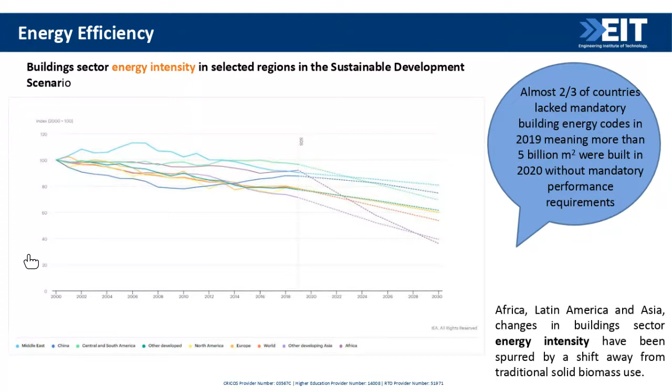So let's move to the next one. Another important point I'd like to cover with you today: heating and cooling. These are important aspects to consider.

About heating, as you can see, this line refers to the Sustainable Development Scenario. The main purpose is 2030. It seems far off, but it's not so far. The main idea is to try to reduce fossil fuel-based equipment when you think about heating.

When you think about cooling, space cooling, just to have a broad idea, it's about 1 gigaton of CO2 emissions, nearly 8.5% of total final electricity consumption in 2019.

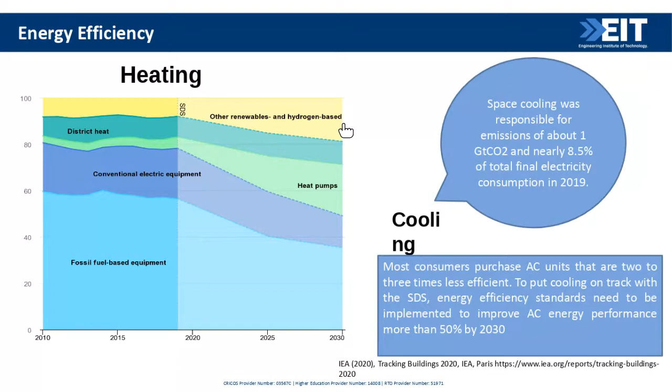Here we have another interesting data point to analyze in terms of lighting. We know in terms of design, there are different approaches to improve natural light - we can maximize daylight, we can use skylights where appropriate.

But let's have a look at the LED sales. According to this data, what we can see is good news - the number of LED sales is increasing, because the cost is falling in different countries' markets, and sales are growing on track. Hopefully, according to the International Energy Agency, this data retrieved from their website shows 90% of sales by 2030.

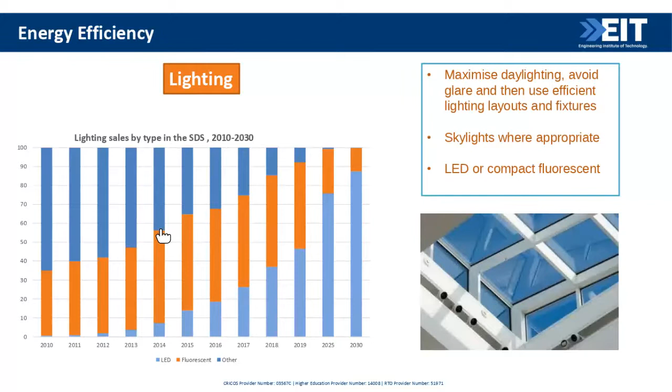So all these are some minimal points that we can consider, points that can contribute to improving our industry in terms of energy consumption. Some points that we can improve in our industry, but thinking about buildings.

Here I want to share with you how to analyze the environmental impact of buildings. I know today our main focus is energy efficiency, but as you can see, different stages - extraction of raw materials, manufacturing, construction sites, operation and maintenance, demolition - all these phases demand lots of energy. It even depends on the selection of materials, depends on energy in construction. We need to consider the embodied energy when selecting materials if you're looking at the pre-building phase.

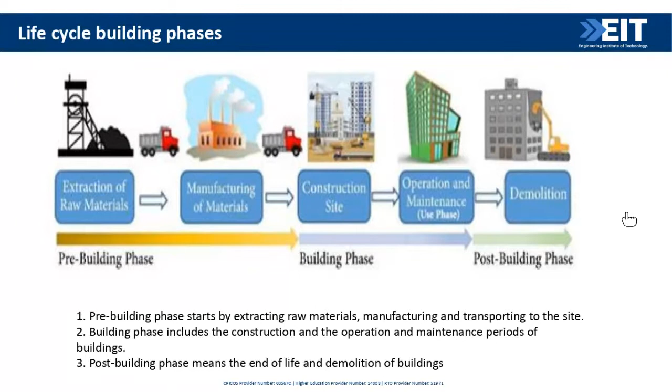So today we will be looking at the operational phase of buildings. That's why I'll be referring to some factors we need to consider when designing a new building. Here we have a brief idea of the life cycle building phases, because when you conduct a life cycle assessment of buildings and want to estimate energy consumption across these different phases, we need to have the best idea of the entire life cycle of buildings.

That's why nowadays we have these very powerful tools. We have different software, building modeling software, and we can also combine this approach with life cycle assessment. When you combine these methodologies, life cycle assessment, and you have your model available via building information modeling, we can combine this type of analysis.

For example, if you integrate some analysis from Green Building Studio with some software that we can incorporate as a plugin, in this case Revit, we can use Revit and Green Building Studio, and attached to this we can work with life cycle assessments. We have different software available in the market just to conduct life cycle assessment, but here I want to share with you the type of analysis that you can conduct, and you can play with different parameters.

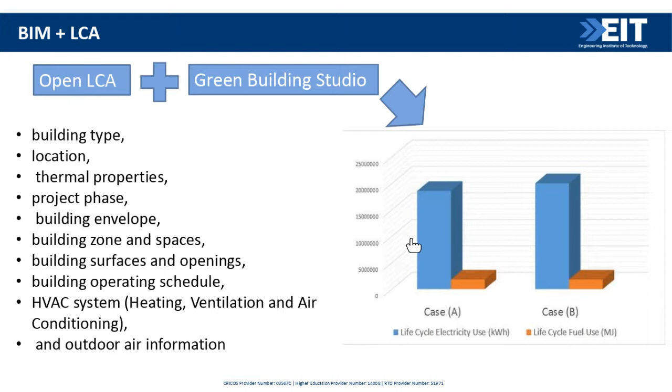You can compare life cycle electricity, energy, life cycle of electricity if you use electricity or if you use fuel. In this case, when you have different parameters, here's just a comparison in terms of what sort of systems you can use, different materials, different openings in terms of windows and doors, ratios. We can conduct this type of analysis.

And here is much better to illustrate what I'm talking about now, for example combining BIM and LCA. It's a very simple example I can share here with you, but what sort of parameters we can use to analyze, for example in this case, operating energy efficiency, just thinking about cooling loads.

In this case, we can compare two different approaches, case A and case B. I'll highlight this for you: case A and case B, and what sort of components we are looking at - different components, type of structure, walls, materials, different materials, finishing. For example, here we're using ceramics, and in case B we can use a different material.

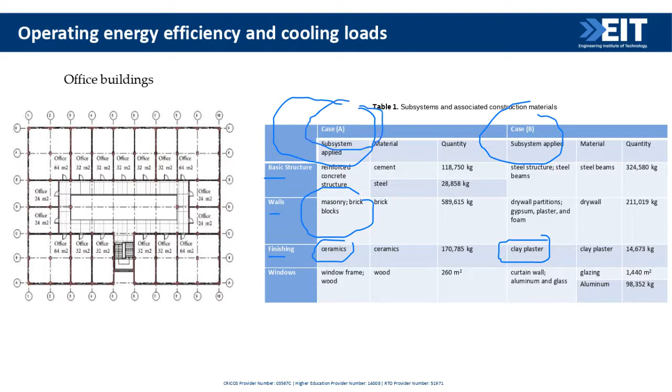But the main idea here today is just to call your attention that we have these powerful tools in our hands just to improve our decision-making. At some point we are responsible to make important decisions in the design, and how can we do this nowadays? We have simulations, right? And here is an example of how simulation can help us decide the most suitable approach, the most suitable material, in terms of the building we have in our hands to design.

In this case, here's an example in terms of office buildings, an example from Brazil. When you have these results, we can analyze, during the year, for different approaches, case A and case B. Previously you could see the difference, the main difference, when we are conducting these simulations. We can play with materials, we can play with the structure, the structural elements, just to analyze.

And here, at the end of the day, what simple outcome can you compare? If you look at case A and case B, the main idea here is between January and December - we have January, February, March, April, and December. These are the months when we see the contribution in terms of walls for case A. You can see the contribution of walls pretty much at the very beginning of the year, and then in December. And in case B, we have the windows, right?

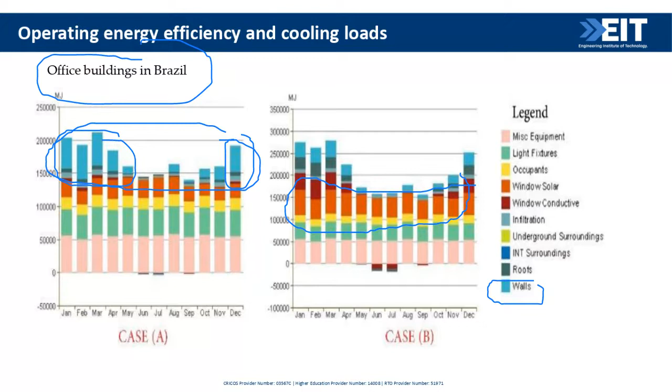That's why this example is just to briefly share with you how we can estimate the operating energy efficiency and cooling loads. Okay.

When you talk about energy efficient design in building, we need to think about the heat loss, heat energy loss, how we can estimate this. It is very important, energy loss here.

The heat energy loss, what we need to think is exactly the point that we have here. I will highlight this just to share with you.

We need to consider all the thermal exchange that can occur in the building, right? And it happens via, as I said before, depends on the walls, the materials, depends on floors, roofs, windows.

Of this building. And normally what we need, the total heat energy loss, the total energy loss, and how we can calculate this.

We need to consider the fabric heat loss, and also we need to consider the ventilation heat loss. Here it is again, just to share with you that when you assess the heat energy loss in buildings,

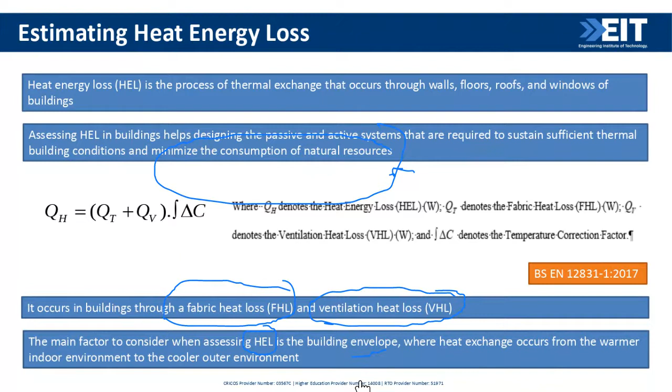a multidisciplinary team, engineers, not only civil, but sometimes mechanical engineers, architects, and construction managers. We can contribute, right, in different aspects.

And this diagram is also important. I'm willing to share with you some possibilities of how we can conduct this type of analysis, how we can estimate

energy heat loss. We have important parameters, I will highlight here. I try different colors just to make it more easy for you to visualize.

So parameters that we need to consider: building geometry, building technologies, building envelope, and temperature difference, right? So for each of them,

we have, for example, building geometry, the number of levels. Okay, we have, in terms of building technology, the U value. It's a very important parameter that we need to work with here.

So we also have, in terms of U value, just to highlight, it's our thermal transmittance. It's going to impact the fabric heat loss, and it's also an important component of a building envelope in different areas, right?

And in terms of the air temperatures, there are parameters that we need. When you look carefully into these different parameters, for example, building envelope, components of envelope, what sort of components we

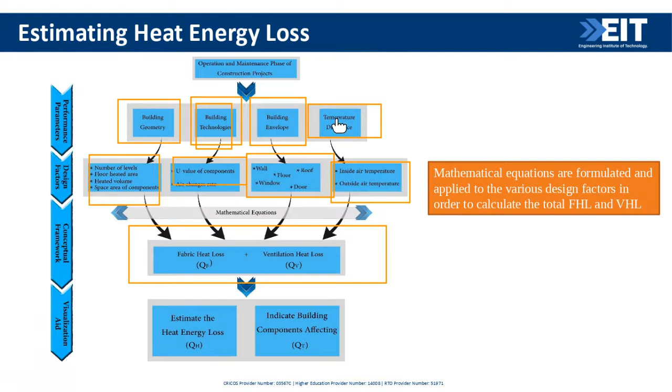And here is just to illustrate, just to share with you that we have here the fabric heat loss, and this depends on factors that we need to consider.

As said before, we need to consider the transmittance, the U value. For different materials, you're going to have a different response.

What I can say today, we can work with software like building information modeling software. For example, this Green Building Studio, this software that you can use to estimate energy, because we can work as we

can just imagine that we are walking into the lab and we can play with different factors and parameters.

And that's why later on we'll discuss the design of experiments, because it's how we can have a better analysis when you can work with a range in different factors that we'll be looking at.

Okay, so we need to calculate in our design, in our analysis, we need to calculate the fabric heat loss of construction components.

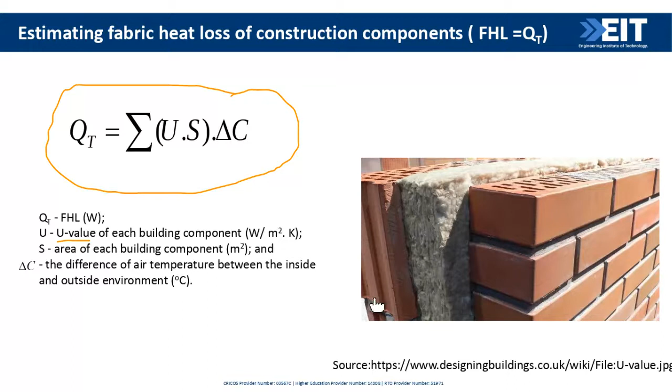Also depends on the area of each building component and the temperature difference of air between inside and outside environment. So some illustration here to share with you.

In addition to this, we also need to work out the ventilation heat loss. Ventilation is super important in your design, because this is the process of replacing air in any space to provide high quality indoor air quality, and it happens through the building envelope, as you can see in these diagrams. That's why we need to consider all these openings, doors and windows.

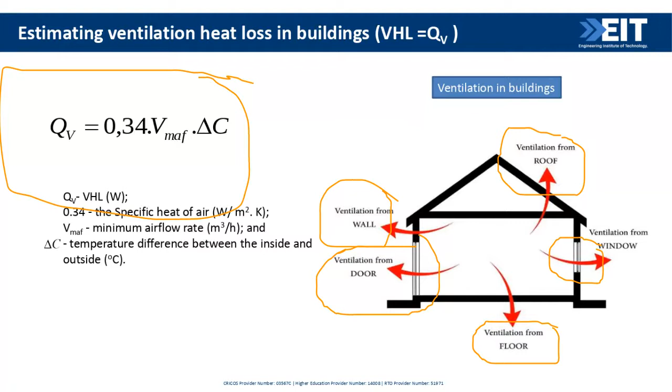Also, we need to observe the materials selected - when selecting materials, determine the materials applied to the floors, the design of the roof, and wall materials as well. These are the main important points to consider when you need to estimate the ventilation heat loss in buildings.

In terms of simulation, you can have complex projects, but for today I selected a very simple example - this case study with a simple project, a single house, just one level.

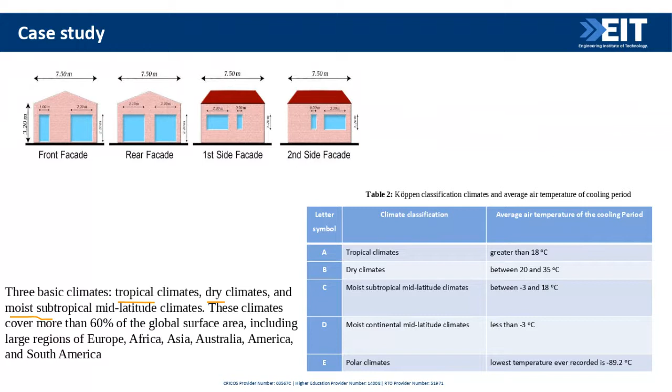The main idea today is to share with you that when you conduct this type of analysis, we need to consider the climate classification, and also the air temperature of the cooling period. For this simulation, we decided to look at some specific climates: tropical climates, dry climates, and moist subtropical mid-latitude climates. We have this table available in the literature.

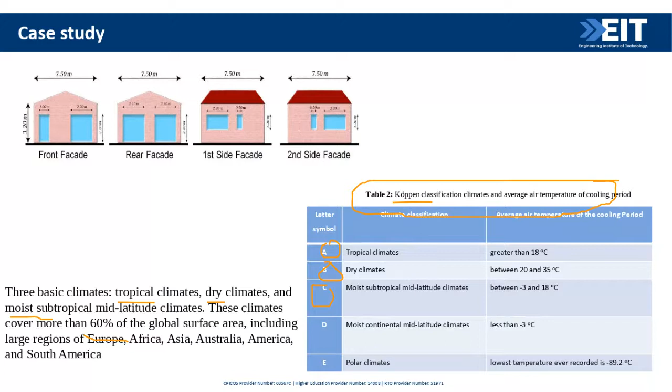This is provided by this author, the Köppen classification. We have these different climates, for example three types: type A, type B, and type C. We decided to work with this one because it covers more than 60% of global surface area. It's just a trial, but it's a very good example of how we can conduct the heat loss analysis.

That is a very interesting outcome I'd like to share with you, as this diagram shows. Very interesting outcome, as you can see here - let me use this pointer. In terms of fabric heat loss, we consider different materials into this building, into this envelope.

Let's start with the fabric heat loss, which depends on the climate, as you can observe. We have tropical, dry climate, and moist subtropical, and here we have the transmittance value. It's super clear that even with different aspects considered - floors, walls, roof, and openings like windows and doors - there's a significant influence depending on the type of climate where your building is located.

As you can see, the moist subtropical, compared with the others, the difference is significant - much more than the other parameters we considered in terms of floors, different materials, or the openings.

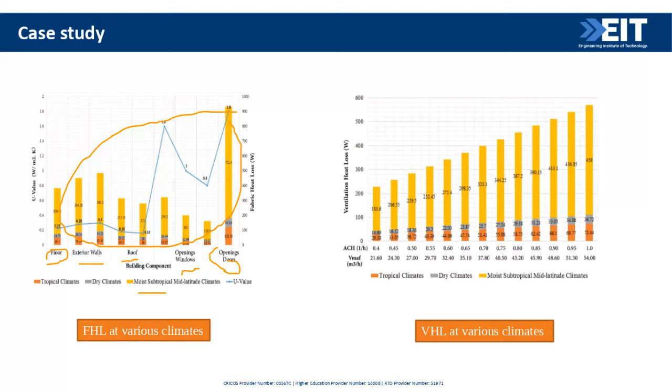The same happened when we decided to estimate the ventilation heat loss at various climates - same situation for both. These results are impressive - the moment you determine the climate, you can influence the total heat loss in your design.

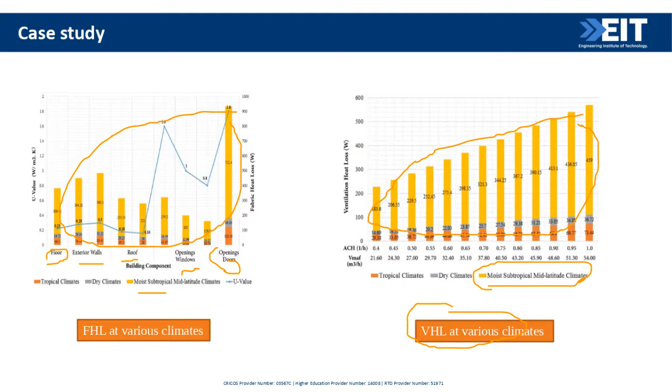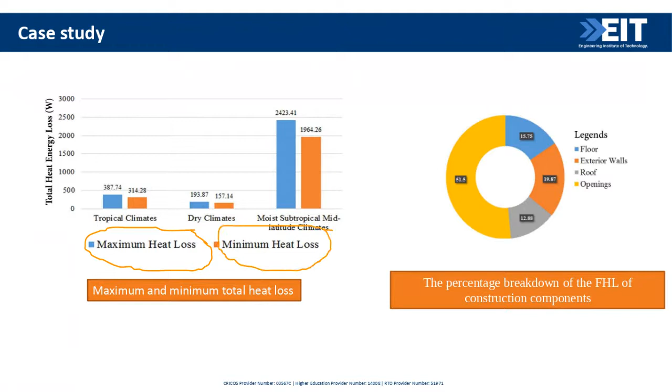Also, another point I'd like to share based on this simulation is that, as we discussed previously, there is the maximum heat loss and the minimum heat loss. You can see the difference when you compare tropical climates with dry and moist subtropical climates.

Here's another important point when you just analyze the fabric heat loss. We have the openings - the main contribution of openings, in this case, compared with the other components.

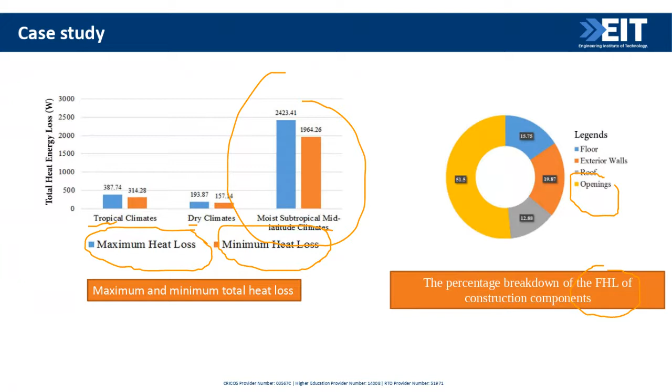At this point, you can see there are so many different parameters that you can use. Now more and more we need to take advantage of important tools available via building information modeling, life cycle assessment, and also software like Green Building Studio, which can calculate the energy loss, the heat loss.

Talking about building information modeling, this is another point I'd like to share with you today - knowing that in different countries, now the starting point...

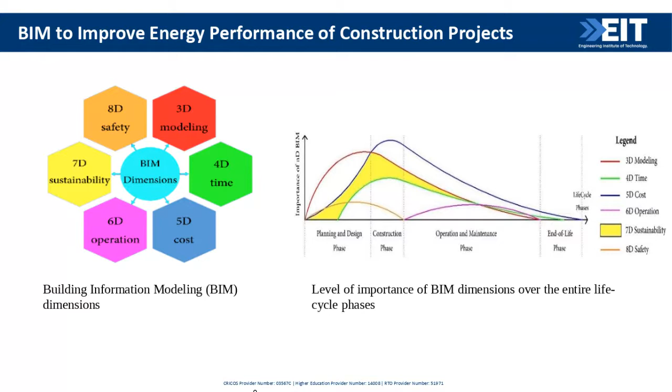Other points I'd like to share with you today, also related to building information modeling. We have the energy use intensity here, in relation to gross building area. So we can work out all the loads - heating, cooling, lighting, all the equipment that we need to use, pumps - in relation to the gross building area.

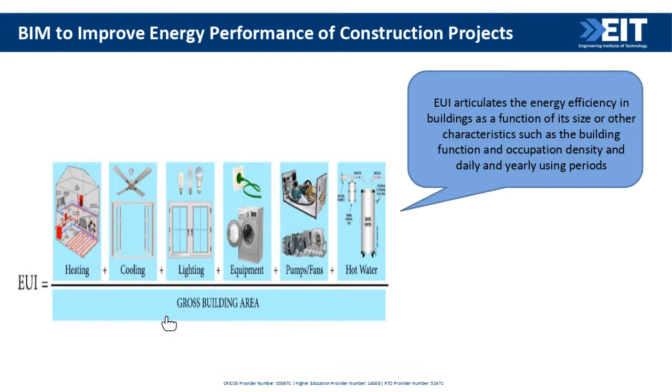So we can articulate all these demands, and it depends on the energy consumed in buildings, as we discussed at the very beginning - it will depend on the heating load, cooling, the lighting. If you're working with natural light, it depends on the lamps that you normally select, also the equipment in relation to the gross building area. This is an important point that we need to consider, that I'd like to call your attention to.

The other point is how we can combine building information modeling and take advantage of it for the performance of our projects. We need to start with the design requirements, and that's why I told you we need to consider working with a multidisciplinary team. We can have energy analysis, architecture analysis, and thermal comfort analysis as well. The majority of the energy consumption, as you could see before, is caused by certain factors, but we need to find alternatives to improve our design, knowing that heating, cooling, and lighting are the loads that will influence the energy performance of your building.

You have to think for the long term, so normally it's going to have a holistic approach in terms of energy consumption and emission. That's why we also need to work together with architecture analysis, just to predict the post-occupancy performance in buildings - another important parameter we need to have in mind. And the comfort analysis - we need to raise all the issues in terms of sustainability. People must be satisfied living in a building, having thermal comfort, to ensure satisfaction of users in this building.

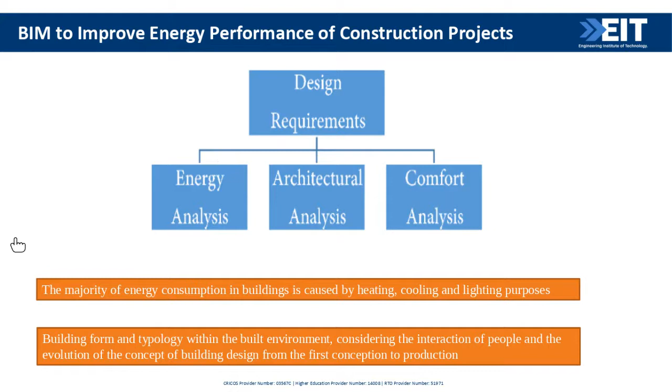What else do we have here? We also have designed some decision support analysis. How can we do this, as we just discussed at the very beginning - when you need to finalize and have a final decision in terms of the design parameters you'll be working with, the initial step is our 2D or 3D model of this building.

This way we can think about the consumption of energy during the operation phase of this building. We need to look at the building properties - what sort of building properties? We need to think about the space and area, basic appliances, type of energy use, whether you're going to work with renewable energy or not, and building components and materials. So that's why we have these, just to summarize how we can conduct this analysis.

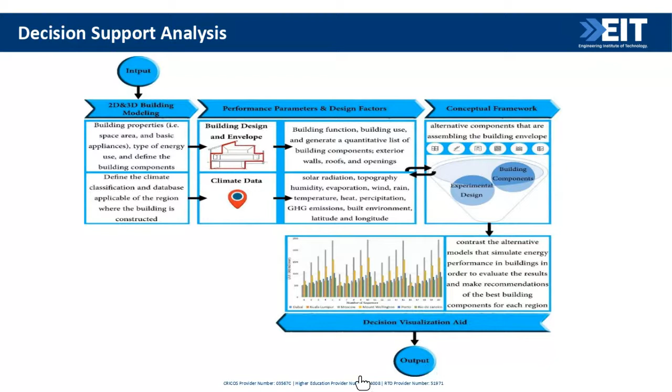As I said before, you can start with our 2D, 3D building modeling. Then we need to combine the building design envelope according to the climate. We need to determine the climate classification, then the building function or usage, and the building components - exterior walls, roofs, all these details and parameters we can work with. Based on all these parameters, we can determine the efficiency of our building and the energy consumption of our building.

This is another perspective. The main idea here is how we can use the tools available just to improve energy performance in our industry, in construction projects. Our starting point is our construction projects. As said before, the first step is we need to combine building modeling and the climate data.

And into the second step, what can be done? We have so many different parameters to analyze - for example, window to wall ratio, building components - all these factors we can work with a range of these values. We can conduct experimental design, using software like Minitab to have a better idea of what parameters and what range we need to investigate.

In terms of software, it depends on which one you are more familiar with, which you are comfortable working with. Here is just an example - for these case studies we discussed today, we worked with Autodesk Green Building Studio regarding its interface with Revit.

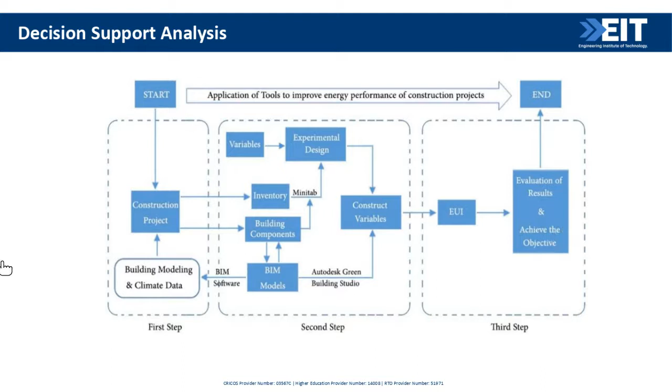And we have the third step, we can make our final decision. Here's how we can validate this decision support analysis - we can conduct some simulation. As you can see, we can have variation. That's why design of experiments is very important, because we can play with different cities, different climate groups, and different classifications. For example, in Dubai we have hot desert climate, and in Rio de Janeiro we have tropical and tropical savanna climate. In this case, we just conduct a simple analysis.

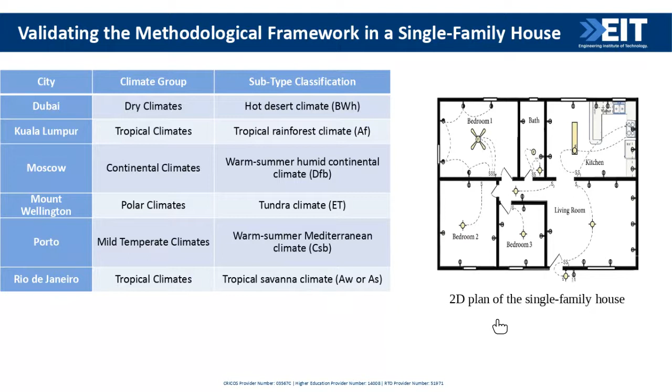Here you have the 2D single family house. This is important just to validate the framework, and the main point today is to share this with you. For example, in terms of walls, we can work with different types of materials and different thicknesses. In terms of roof, we can have different types as well. And a very important factor to consider is the window wall ratio. That's why we have these different factors, and at the end what we need to analyze is the energy use intensity.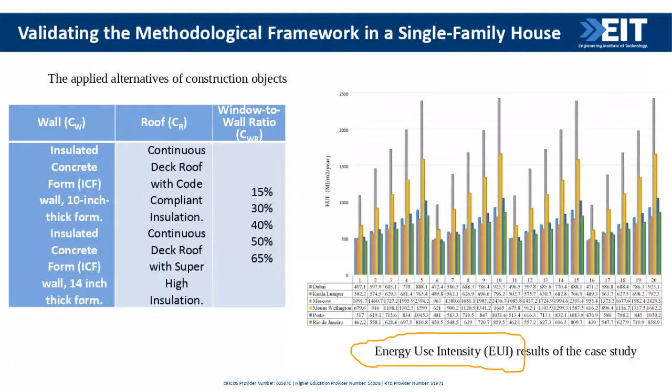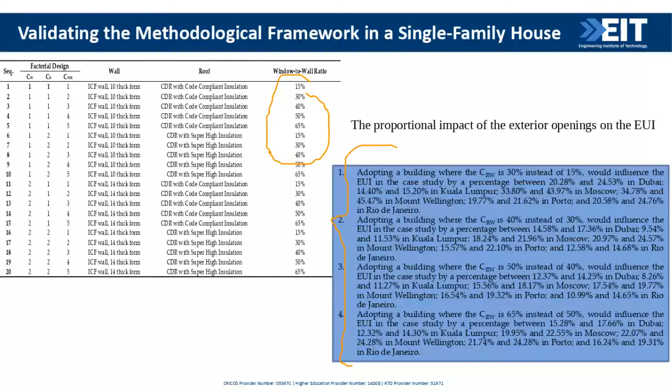As you can see, there are lots of outcomes we can obtain from this analysis. Remember we are comparing different cities in different regions and countries. Considering this type of analysis, you can compare what happens in different designs - you can have the design aspect here, but also attach it to the location and climate where the building is allocated.

Again, this just illustrates the energy use intensity, which is the important point we need to consider. For each window to wall ratio, as you can see, we decided to analyze the lowest and the highest energy use intensity considering different locations.

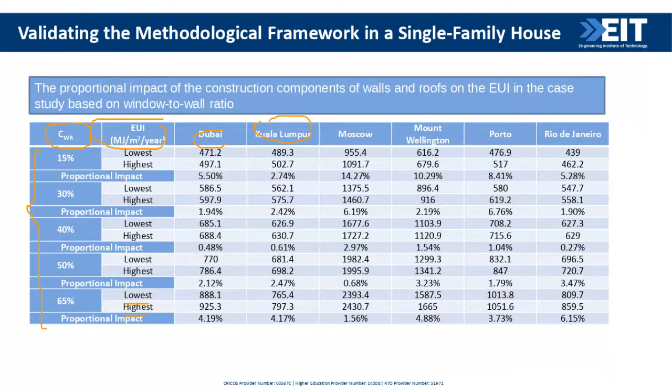So this case study is more to share with you the numerous alternatives and options we have nowadays. If we start working with this combination of life cycle assessment and energy, we need to consider energy efficiency and heat loss.

Just to conclude, I want to share some insights on what can be done to enhance energy efficiency in buildings. For example, climate classification is an important parameter to consider - 33 to 50% of energy for the same building varies between continental climates and polar climate compared with other classifications. Also, one of the case studies showed that the subtype climate classification impact is not significant - it plays a minor role influencing energy consumption in buildings.

Why I'm talking about insights is just to open our mind. I'm not saying that for this application, this simulation, these are some insights we could obtain. Strong relations between openings depends on your perception. Sometimes for an architect it can be obvious, openings and energy use intensity, but you also analyze different climates and other parameters, like different window-to-wall ratios, and this is one of the points you could highlight here.

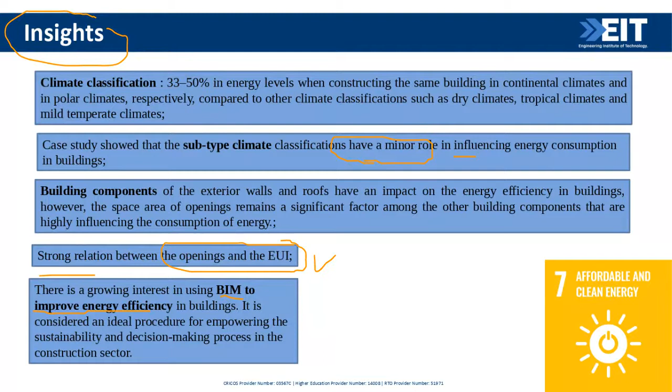Building information modeling is a very important tool to improve energy efficiency in buildings. This is the main purpose of this webinar, just to open our mind to what sort of parameters we can play with, what software we can work with, and how we can calculate heat energy loss depending on your design. As civil engineers or architects, we can.

Have this approach in terms of passive design, but renewable energy is another possibility. When you look at different resources in the literature, there are so many options in terms of passive design or solutions that together can improve energy efficiency in buildings, and even more, you can work with renewable energy. More and more, solar energy is used in different countries. We have this possibility in Australia, it's huge, I can tell you. Ceilings and roof space are important to consider too, with 25 to 35% winter heat loss. That's why it must be very well insulated.

All this is just to summarize that we have the Sustainable Development Goals, and we know our industry, sadly, the construction sector is well known as the industry of 40s. You know why? 40% energy consumption, 40% usage of natural resources, and 40% waste disposal. So it's time for all of us to work collaboratively, architects, mechanical engineers, civil engineers, to try to change how our industry is known nowadays.

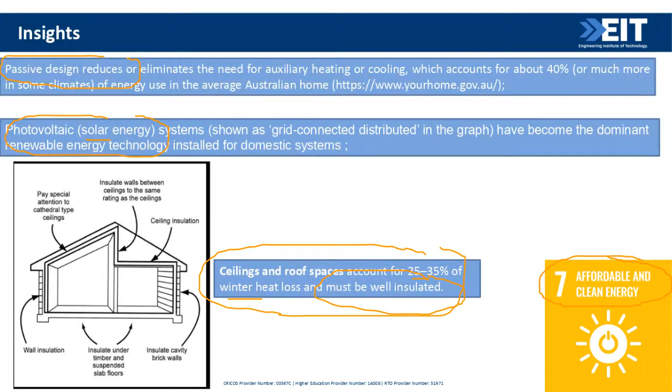So some ideas that I'd like to share with you. It's over to you, Riley. I know there are so many questions in the chat box. If it's not possible to answer today, Riley, you can forward some emails and I can reply to the questions properly. It's a huge topic.